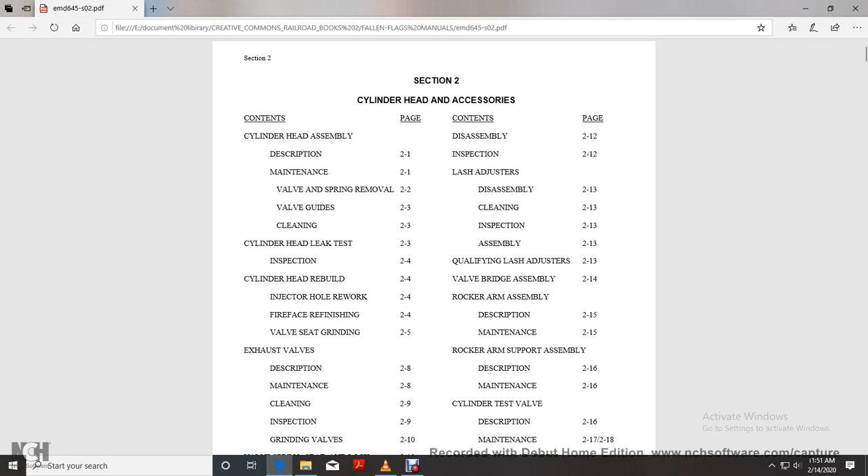Cylinder head assembly: description, maintenance, valve and spring removal, valve guides, cleaning, cylinder head leak test, inspection, cylinder head rebuild, injector hole rework, fire face refinish, valve seat grinding, exhaust valve description, maintenance, cleaning, inspection, grinding valves, valve spring seat lock, exhaust valve seat installation, valve stem height check, valve seat seal test, exhaust valve bridge assembly description, cleaning, disassembly inspection, lash adjusters, disassembly cleaning, inspection assembly, qualifying lash adjuster, valve bridge assembly, rocker arm assembly description maintenance, rocker arm support assembly description maintenance, cylinder test valve description maintenance, cylinder head seating ring description maintenance, service data, specification, equipment list.

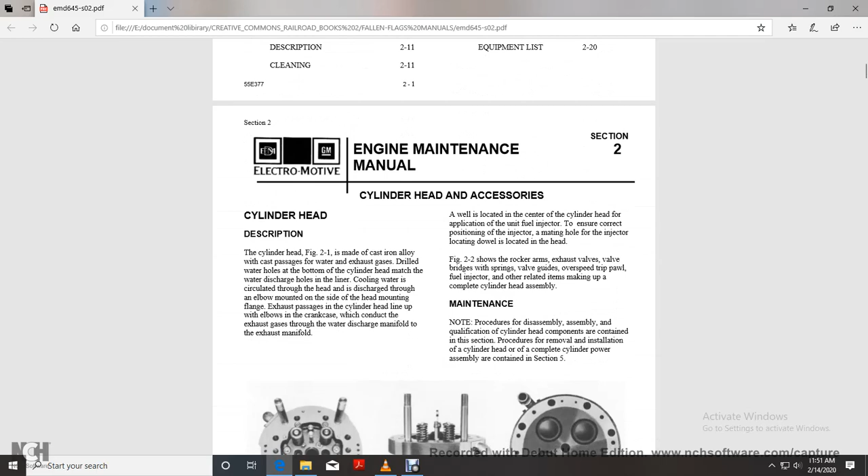Cylinder head and accessories, engine maintenance manual, section 2. Cylinder head and accessories, cylinder head, description.

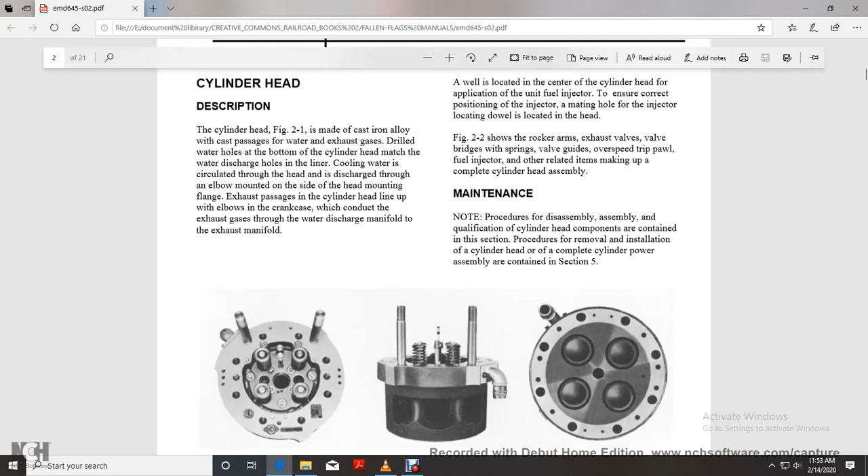Note: procedures for disassembly and qualification of cylinder head components are contained in this section. Procedures for removal and installation of a complete cylinder head power assembly are contained in section 5.

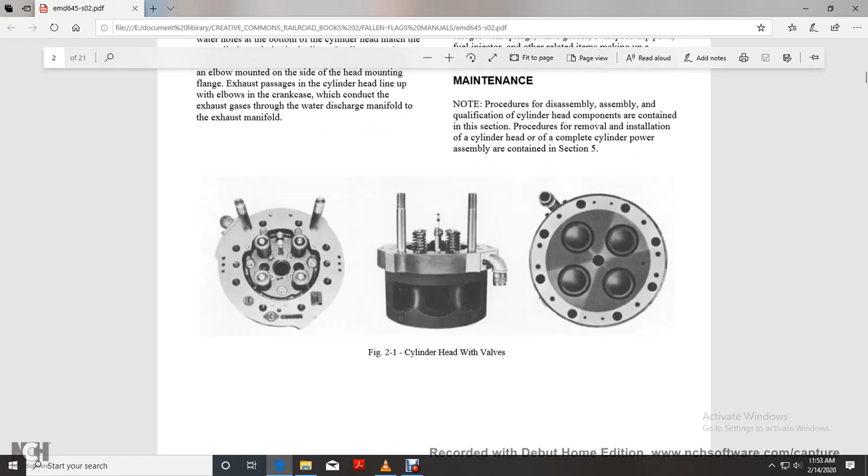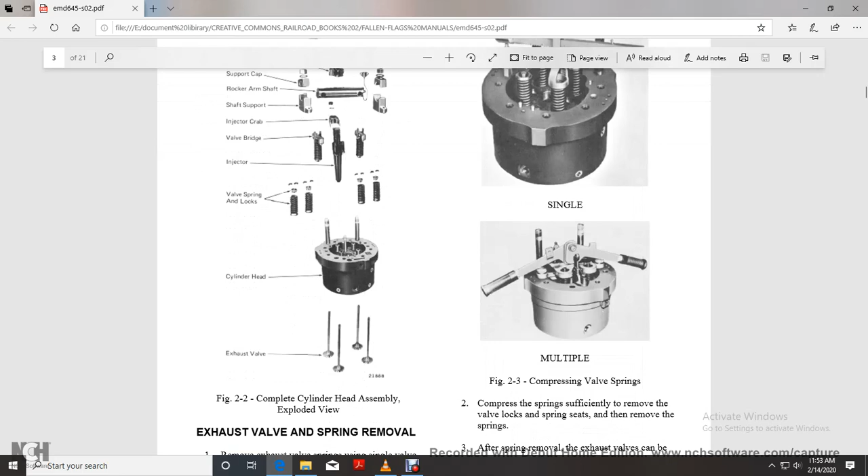So this would look like your cylinder head valve assembly with valves. You have your rocker arms, your overspeed pawl seat, overspeed pawl, the cam support cap screws, rocker arm shaft support, injector crab, valve bridge, valve seating, injector valve spring and locks, cylinder head, exhaust valves. Figure 2-2 shows the cylinder head in exploded view. Figure 2-3 shows the compression tool for the valve springs, used for compressing the valve springs.

Your exhaust valve and spring removal: remove the exhaust valve spring using a single valve compressor adapter screwed into the head, or a multiple valve spring compressor as shown in figure 2-3. Compress the spring sufficiently to remove the valve spring seats, then remove the springs. After spring removal, the exhaust valve is removed from the bottom of the head. Note: the valve springs can be removed in place without removing the cylinder head from the engine. If this is done, the piston must also be at top center to prevent the valves from falling into the cylinder while the valve locks are removed.

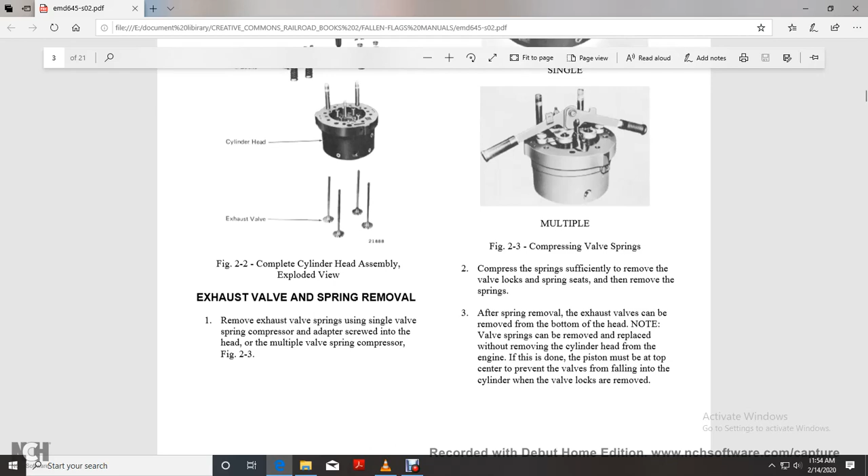Your valve guides: cast iron guides are press fit, and the cylinder head can be pressed in or out using a valve guide installing and removal tool without damage. Although the valve guides generally do not require reaming after assembly, it's recommended that a plug gauge be inserted after guide installation to ensure minimum diameter.

Clean the cylinder head in a suitable solvent to remove strip oil solution and baked-on carbon. Cleaning should be done in accordance with accepted practice or as recommended by the supplier of the cleaning material. Caution: do not use any form of blast cleaning, such as glass, sand, or shot, on the fire face of the head, as the blast tends to remove the sharp edge of the phonographic grooves of the gasket surface, reducing sealing effectiveness.

Remove loosened materials from the stud holes using the hole cleaner with a 115, 200, or 230 volt drill. Figure 2-4 shows cleaning of the stud holes.

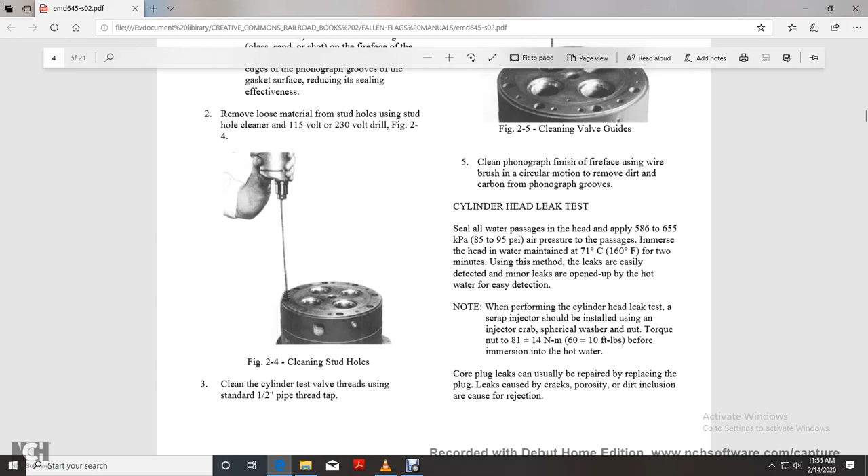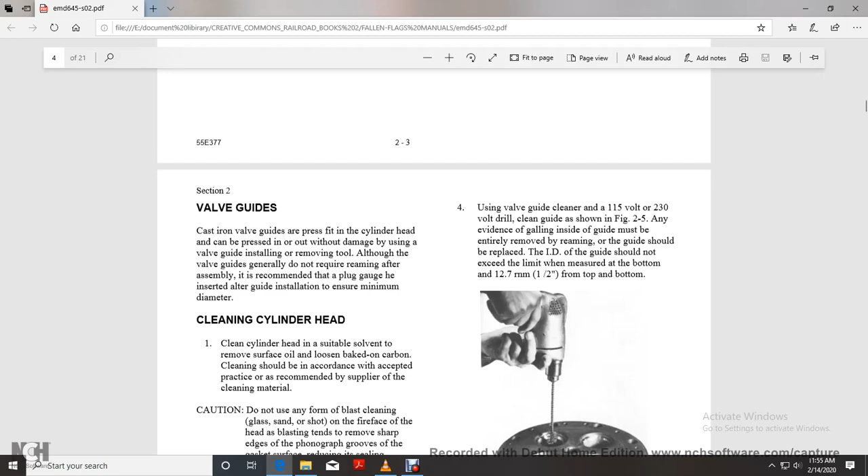The cylinder test valve uses threads using standard 1/2 inch pipe thread. Use the valve guide cleaning tool with a 115 or 230 volt drill; the clean guide is shown in figure 2-5. Any evidence of galling inside the guide must be entirely removed by reaming. If galling cannot be removed, the guide should be replaced, and the inside diameter of the guide should not exceed the limit measured at the bottom, a half inch at the top and bottom.

Figure 2-5 shows cleaning of the valve guides. Clean the phonographic finish fire face using a wire brush with circular motion to remove dirt and carbon from the phonograph grooves.

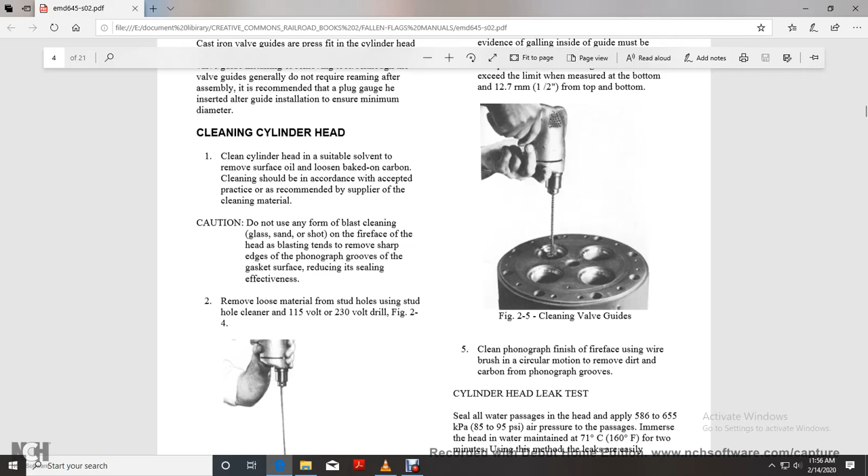Your cylinder head leak test: seal all water passages in the head. Apply 586 to 655 kilopascals of air pressure, or 85 to 95 psi, to the passage. Immerse the head in water maintained at 160 degrees Fahrenheit for 2 minutes using this method. Leaks are easily detected; minor leaks are detected more easily by heating the water.

When performing a cylinder head leak test, scrap injectors should be installed using an injector crab, spherical washers and nuts. Torque nuts at 60 plus or minus 10 foot-pounds, before immersion into the hot water.

Core plug leaks usually require replacing plugs. Leaks caused by cracks, porosity, or dirt inclusions are cause for rejection.

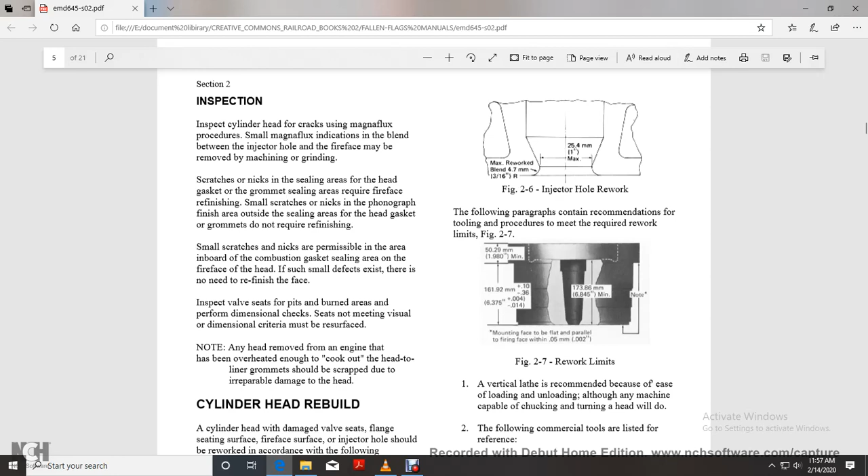Small scratches and nicks are permissible in the area of the inboard combustion gasket sealing area on the fire face of the head. If only such small defects exist, there is no need to refinish the face.

Inspect valve seats for pits and burned areas, and perform dimensional checks. Seats not meeting visual or dimensional criteria must be resurfaced.

Any head removed from the engine that has been overheated, with a cooked-out condition at the head-to-liner grommets, should be scrapped due to irreparable damage to the head.

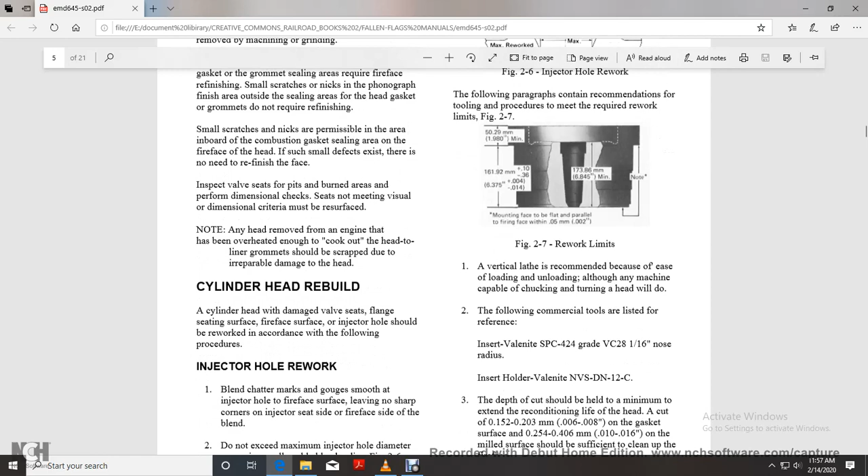For cylinder head rebuild: the cylinder head with a damaged valve seat, flange seating surface, or fire face surface, or injector hole should be reworked in accordance with the following procedure.

Injector hole rework: blend chatter marks and grinder gouges smooth at the injector hole fire face surface. Leave no sharp corners on the injector seat side or fire face side after blending. Do not exceed the maximum injector hole allowable blend radius shown in Figure 2-6.

Next, the fire face and flange seating surface refinish. Refinishing the cylinder head fire face and flange requires small special tool processes. Figure 2-6 shows the injector hole rework.

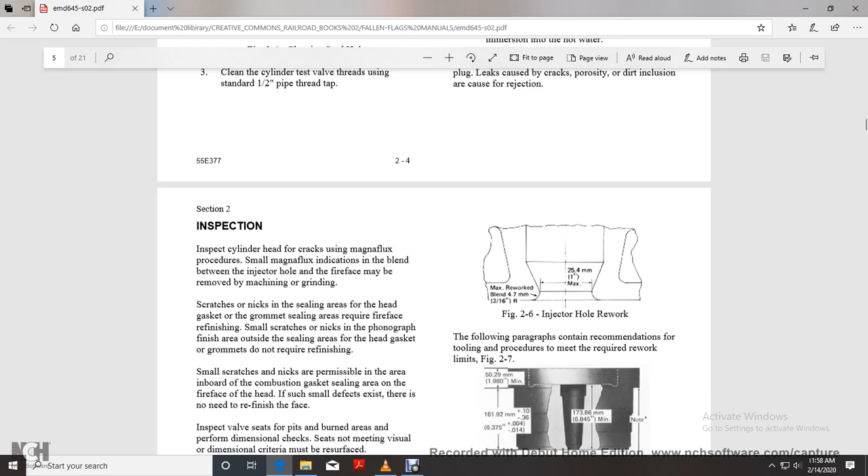Maximum 3/16 of an inch and maximum 1 inch for the rework blend. The following paragraphs contain recommendations, and the following tools and procedures meet the requirements.

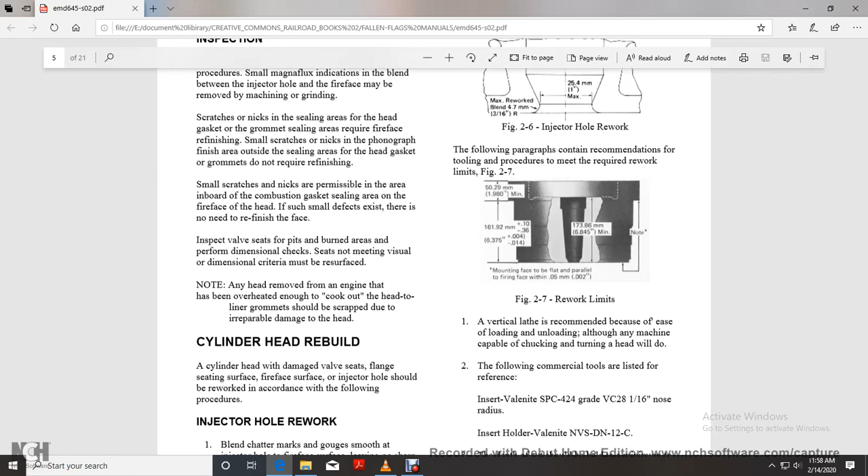Figure 2-7 shows the rework: the mounting face should be flat and parallel to the fire face within 0.002 of an inch. A vertical lathe is recommended for ease of loading and unloading, although a machine capable of chucking and turning the head will also do. The following commercial tools are listed for reference.

Insert: Valenite SPC 424/8, grade VC 28, 1/16 inch nose radius. Insert holder: Valenite.

NVSDN 12C. By the way, happy Valentine's Day. It's February 14th.

Depth of cut should be held to a minimum to extend the reconditioned life of the head. A cut of 6 to 8 thousandths of an inch on the gasket surface and 10 to 16 thousandths on the mill surface should be sufficient to clean up the fire face.

To minimize the depth of cut, care should be taken to set up off the fire face rather than locating off the top of the flange.

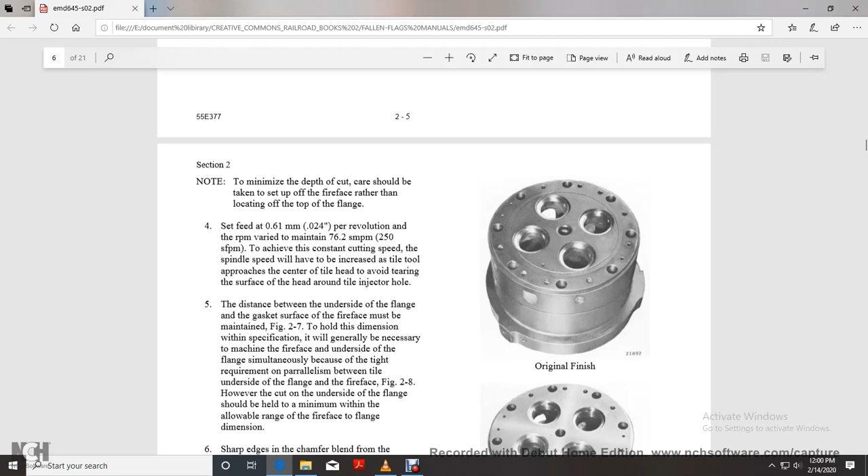The feed should be set at 24 thousandths of an inch per revolution. RPM varies but is maintained at 250 SFPM. To achieve constant surface speed, the spindle speed will have to be increased as the tool approaches the center of the head, to avoid tearing the surface of the head around the injector hole.

The distance between the underside of the flange and the gasket surface of the fire face must be maintained, as shown in Figure 2-7, holding the dimension to specification.

It will generally be necessary to machine the fire face and underside of the flange simultaneously, because of the tight parallelism requirement between the underside of the flange and the fire face.

As shown in Figure 2-8, the cut on the underside of the flange should be held to a minimum within the allowable range of the fire face to flange dimension.

The sharp edge of the chamfered blend at the injector hole fire face must be blended smooth using emery cloth. Deep scratches and gouges should be reworked in accordance with the injector hole rework procedure.

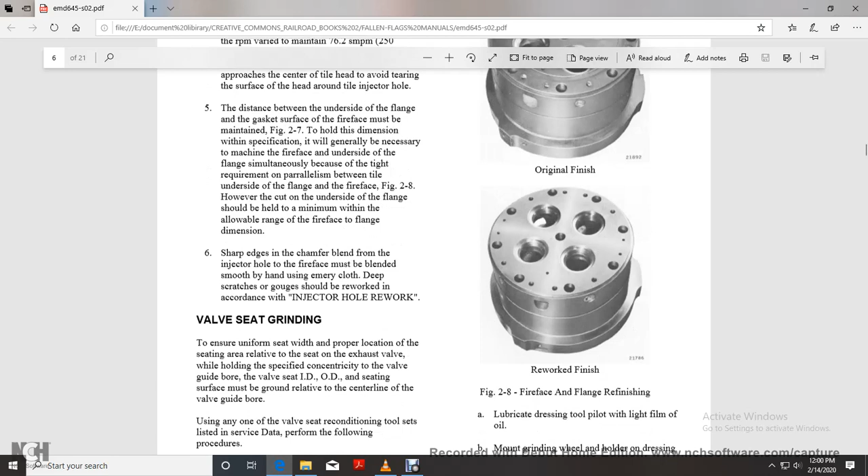Valve seat grinding: to ensure a uniform seat width and proper seating area relative to the valve, while holding specific concentricity to the valve guide bore, the valve seat inside diameter, outside diameter, and seating surface must be ground relative to the center line of the valve guide bore.

Using any of the valve seat reconditioning tool sets listed in the data, perform the following procedures: mount each of the 3 grinding wheels on its own holder, setting the 45 degree wheel to 65 degrees, the 30 degree wheel to 20 degrees, and the finishing wheel to 30 degrees.

Using a separate dressing tool for each wheel, maintain the seat angle accuracy. This shows the fire face and flange refinish, original and reworked finish.

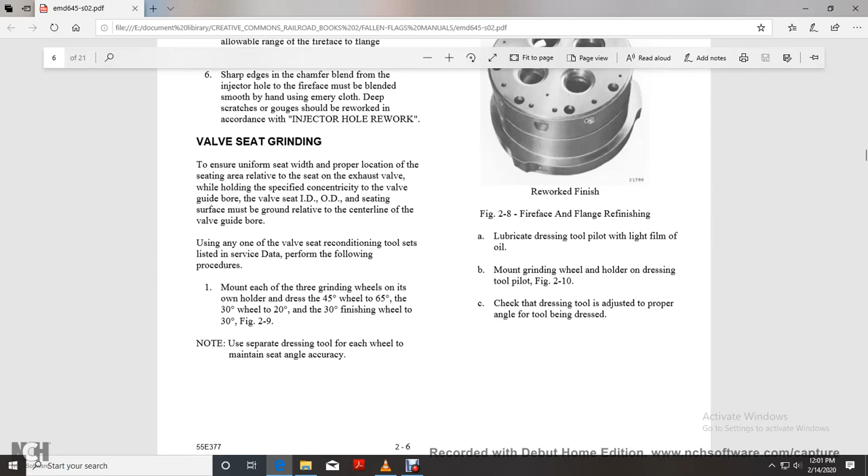Check the dressing tool and adjust the proper angle of the tool to be dressed. Alright, this figure 2.9 shows your valve seat grinding wheels and holders. Inside diameter 65, outside diameter 20, seat surface 30. Alright, figure 2.10 shows your dressing valve seat wheel grinder, grinding wheel holder, grinding wheel dressing valve tool.

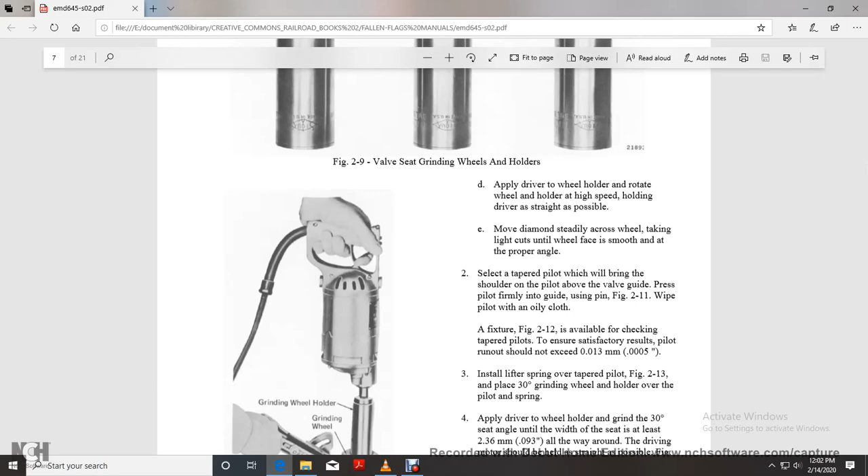Alright, apply the driver to the wheel holder, rotate the wheel holder at high speed, holding the driver as straight as possible. Move the diamond steadily across the wheel, taking light cuts of the wheel face, as smooth and at a proper angle. Select a tapered pilot which will bring the shoulder of the pilot above the valve guide. Press the pilot firmly into the guide, figure 2.11. Wipe the pilot with an oil cloth, fixture 2.12 if available.

Checking tapered pilots is to assure satisfactory results. Pilot runout should not exceed 5/10,000ths of an inch. Install lifter spring over tapered pilot. Figure 2.13, place 30 degree grind wheel holder over the pilot and spring. Apply driver to wheel holder, grind 30 degree seat angle with the width of the seat at least 93/1,000ths of an inch.

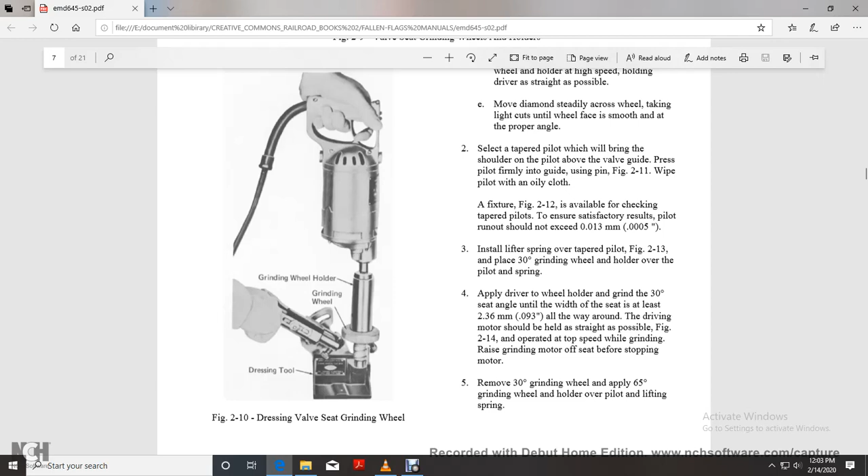All the way around, the driving motor should be held as straight as possible. Figure 2.14, operate at top speed; raise the grinding wheel off the seat before stopping the motor. Alright, remove the 30 degree grind wheel and apply a 65 degree grind wheel and holder over the pilot and lifting spring. Alright, figure 2.11 shows your tapered pilot installation. 2.12, tapered pilot fixture check. 2.13, your lifting spring application. 2.14, grinding valve and seat.

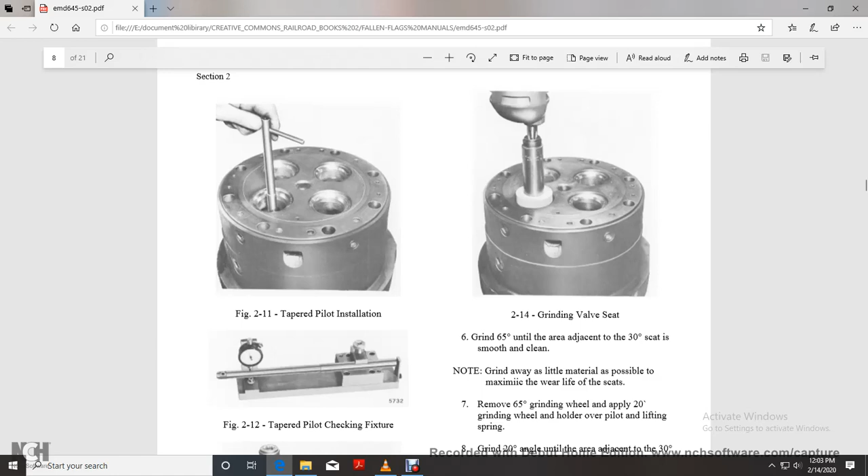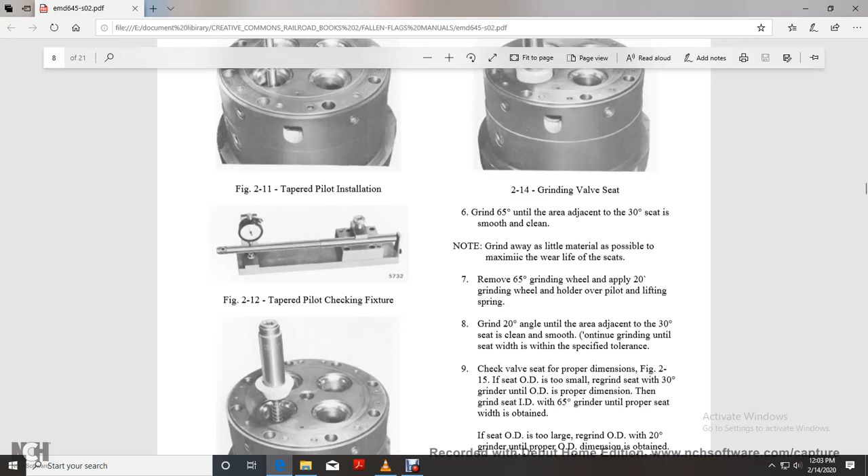Alright, 6, grind 65 degrees until the area adjacent to the 30 degree seat is smooth and clean. Note, grind away as little material as possible to maximize the wear life of the seats. Remove 65 degree grinding wheel, apply 20 degree grinding wheel and holder over the pilot and lifting spring. Grind 20 degree angle until the area adjacent to the 30 degree seat is clean and smooth. Continue grinding until the seat width is within the specified tolerance.

Check the valve seat for the proper dimension, figure 2.15. If seat outside diameter is too small, regrind the seat at 30 degrees until the outside diameter is the proper dimension. Grind the seat inside diameter with the 65 degree wheel until the proper seat width is obtained. If the outside diameter is too large, regrind the outside diameter with a 20 degree grinder until the outside dimension is obtained. If the seat is too small, grind the seat with a 30 degree grinder and the outside diameter with a 20 degree grinder alternately until the proper outside diameter and seat width are obtained.

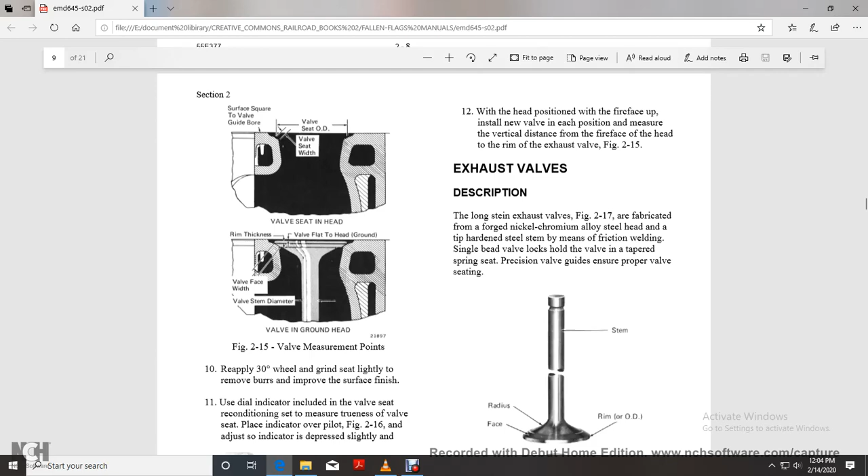Alright, figure 2.15 shows your valve measurement points. Your outside diameter, valve seat width, surface, valve guide bore, rim thickness, valve flat head, valve face width, valve stem diameter. Reapply 30 degree wheel and grind slightly to remove burrs and improve surface finish.

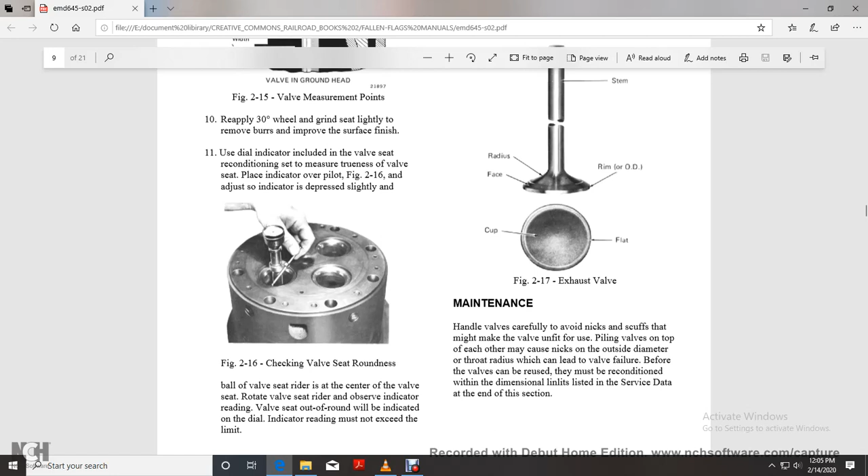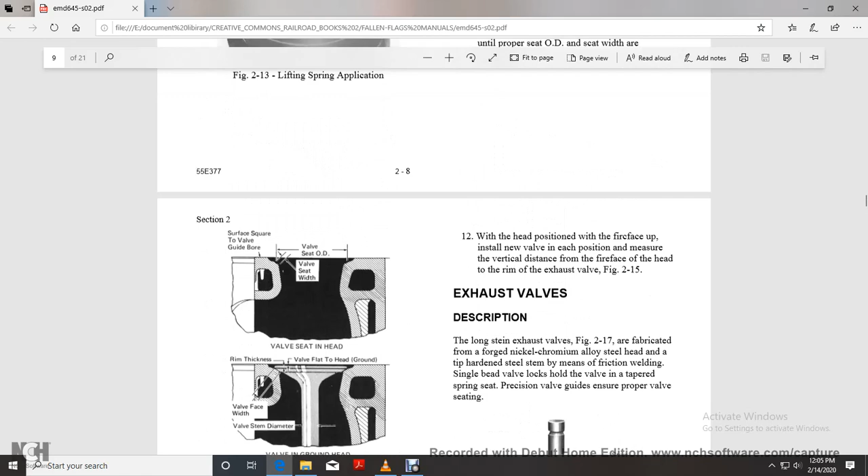Use a dial indicator on the reconditioned valve seat to measure trueness of the valve seat. Place indicator over the pilot, figure 2.16. Adjust so the indicator is depressed slightly and the ball rides in the center of the valve seat. Rotate the valve seat rider. Observe the indicator reading. Valve seat out of round will indicate on the dial. Indicator reading must not exceed limit. 12. With the head positioned fire face up, install the new valve. At each position measure the vertical distance from the fire face of the head to the rim of the exhaust valve, figure 2.15.

Exhaust valve. The long stem exhaust valve is fabricated with a forged nickel chromium alloy steel head and a tip hardened steel stem joined by means of friction welding. Tapered spring seat and precision valve guides ensure proper valve seating. Shows the stem radius, face, the rim outside diameter, cup, and flat.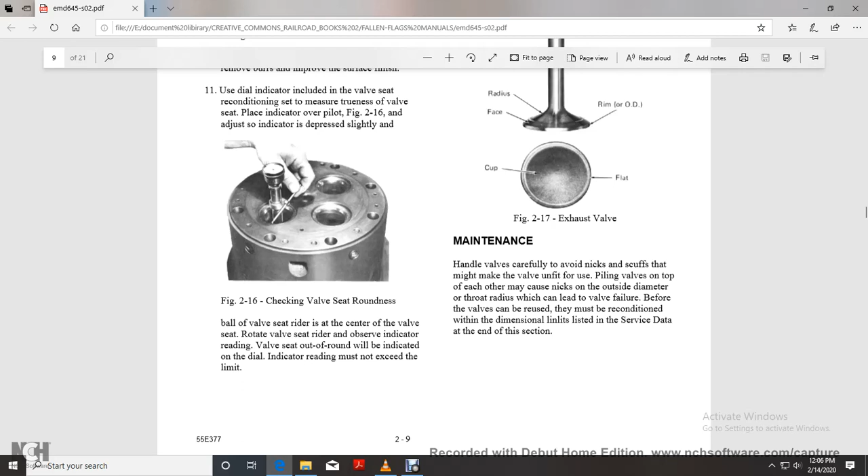Alright, your maintenance. Handle valves carefully to avoid nicks and scuffs that might make the valve unfit for use. Piling the valves on top of each other may cause nicks on the outside diameter and the throat radius, which can lead to valve failure. Before the valves can be reused, they must be reconditioned to the dimensions listed in the service data at the end of this section.

Cleaning. Thoroughly clean the exhaust valve. Use a suitable solvent to remove the surface oil, loose carbon, and if necessary, glass bead. Vapor blasting. Remove the hardened carbon deposits from the valve. The grit for vapor blasting must be maintained at a small enough size so the surface finish of the valve stem is not roughened beyond 0.635 microns or 25 microinches.

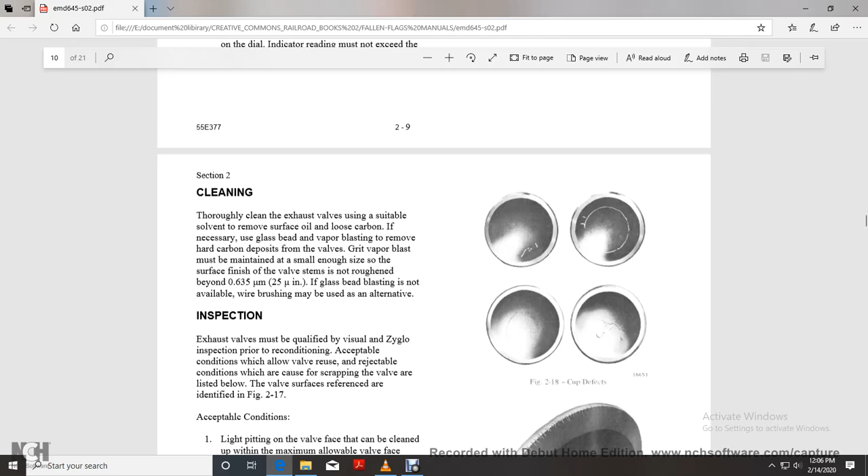If glass bead blasting is not available, a wire brush may be used as an alternative. Inspection: exhaust valves must be qualified by visual Zyglo inspection prior to reconditioning. Conditions which allow for reuse and rejectable conditions of the valve are listed below. The valve surfaces referenced are identified in Figure 217.

Acceptable conditions. Pitted valve faces can be cleaned up to the maximum allowable valve face limit. Protruding nicks and gouges on the valve stem must be removed before the valve face is ground in order to avoid scuffing the valve guide. Ensure proper valve face runout. Sanding or buffing may be used for polishing off protrusions, provided the surface finish of the stem is maintained below 25 micro-inches, with a circumferential lay.

Rejectable conditions. Indications in the cup area, Figure 218, are cause for rejection of the valve. Any cracks found in the outside rim of the ring section of the valve, Figure 219, are cause for rejection, since rim cracks usually extend some distance into the valve face. They usually lead to failure. Figure 218 shows cup defects, and 219 shows face and ring defects.

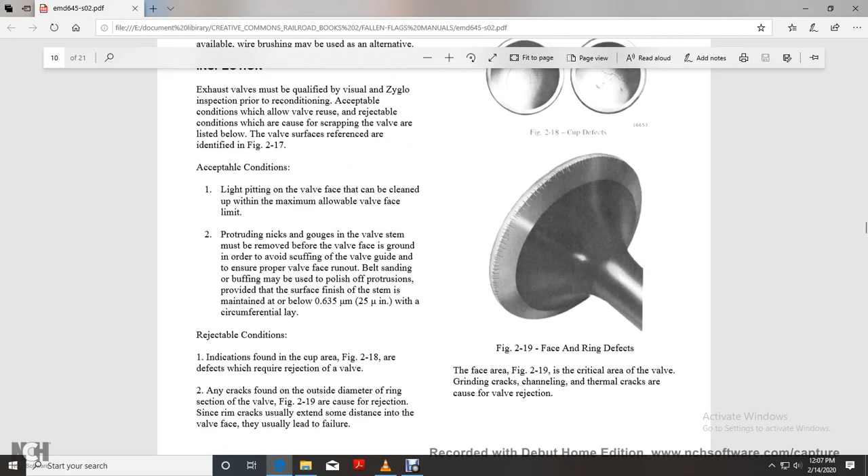Face area, Figure 219, is the critical area of the valve; grind cracks or thermal cracks cause valve rejection. Fretting wear of the lock groove area of the stem is cause for rejection. Reject valves that have damaged critical surfaces that have been nicked or scuffed. Grinding valves: follow instructions supplied with the 115/230 volt valve grinding equipment. The equipment required is contained in the service tool catalog.

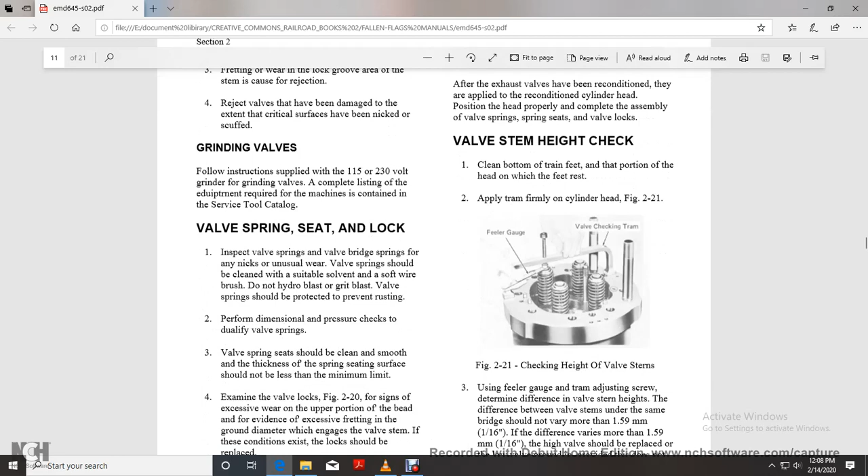Valve spring, seat and lock. Inspect the valve spring and seat for unusual wear. Valve springs should be cleaned with a suitable solvent and a soft wire brush. Do not hydroblast or grit blast. Valve springs should be protected to prevent rusting. Perform dimensional and pressure checks. The valve spring seat should be clean and smooth, and the thickness of the spring seating surface should not be less than the minimum limit.

Examine the valve locks for signs of excessive wear of the upper portion of the bead, or evidence of excessive fretting in the groove diameter that engages the valve stem. If this condition exists, the lock should be replaced. Figure 220 shows the valve spring seat and lock.

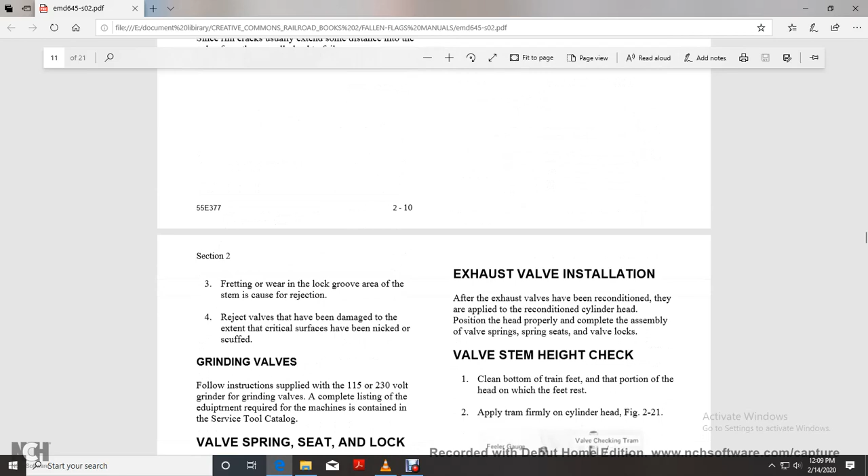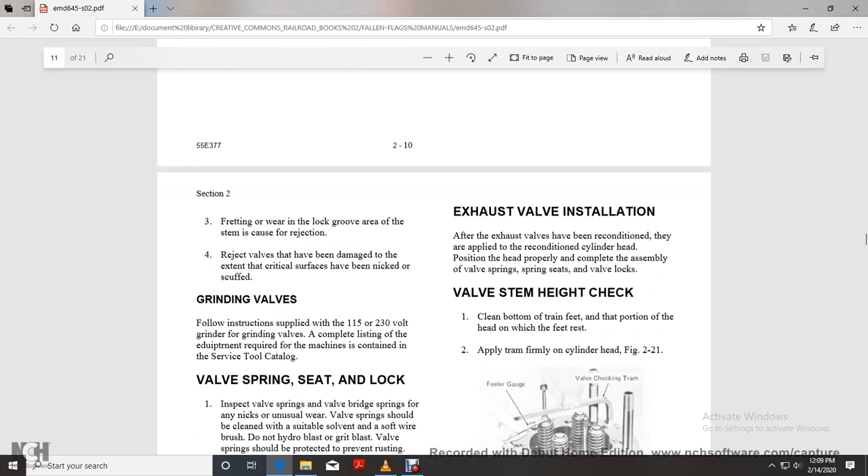Exhaust valve installation. After exhaust valves have been reconditioned, they are applied to a reconditioned cylinder head. Position the head, then complete the assembly of valve spring, seat, and valve lock. Valve stem height check. Clean the bottom of the tram feet rests on the head. Apply the tram firmly on the cylinder head. It shows a feeler gauge checking valves with the tram.

Figure 221. Use the feeler gauge and the tram adjusting screw to determine the difference in valve stem height. The difference between valve stems under the same bridge should be no more than 1/16 of an inch. If the difference exceeds 1/16 of an inch, the high valve should be replaced or the low valve ground in, provided that this does not exceed the limit. The valve stem tip should not be ground off, as it is hardened.

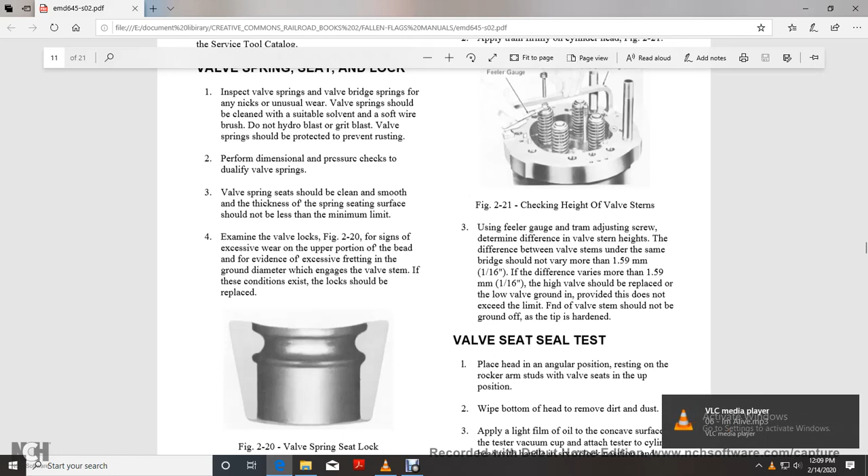Valve seat seal test. Place the head in an angular position resting on the rocker arm studs, valve seats in the up position. Wipe the bottom of the head to remove dirt and dust. Apply a light film of oil to the concave surface of the tester vacuum cup. Attach the tester to the cylinder head, handle in the 6 o'clock position, covering one valve.

Figure 222 shows the use of the valve seat tester. Ensure the tester cup is firmly seated on the fire deck, not on the head of the valve. If the tester suction is depleted in less than 2 minutes, the valve seat is defective. The head seat and the valve face must be reworked. Open the trigger valve to remove the tester from the head surface. Check the tester for leaks by applying it to a vertical piece of glass. If it releases, the rubber cup may be defective.

Exhaust valve bridge assembly. Description: the valve bridge in Figure 223 operates two exhaust valves from one rocker arm. The spring seat is held on the valve bridge stem by a lock; the spring seat rests in a socket of the cylinder head, and the spring applies pressure to maintain contact between the valve bridge and the rocker arm. The hydraulic lash adjuster maintains zero lash between the end of the valve stem and the valve bridge. Lube oil flows from the rocker arm through the drilled passage in the valve bridge and onto the top of the lash adjuster.

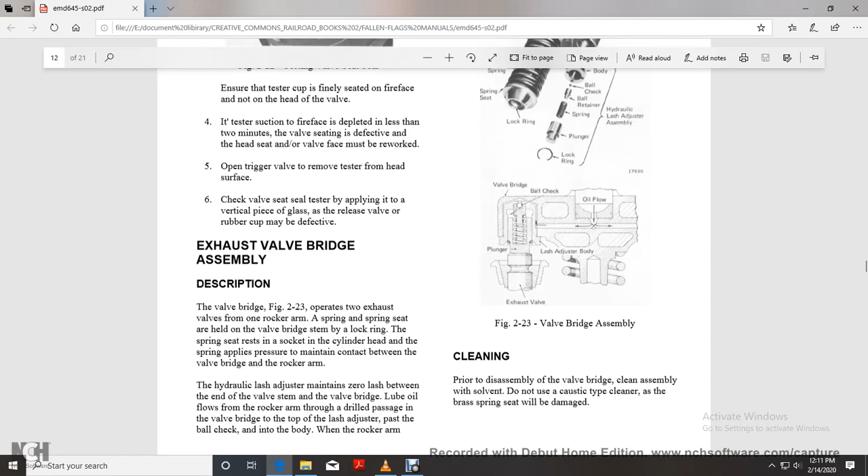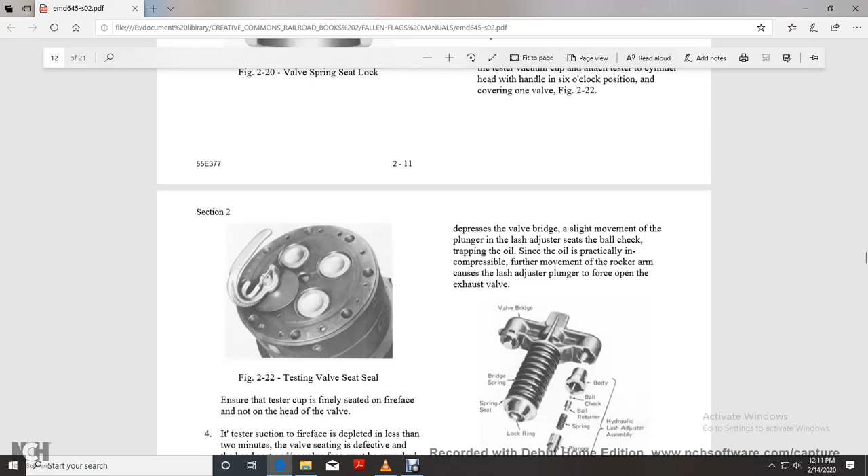Push past the ball check into the body when the rocker arm depresses the valve bridge, slightly moving the plunger, seating the ball check and trapping the oil. Since the oil is practically incompressible, further movement of the rocker arm causes the lash adjuster plunger to force open the exhaust valve.

Alright, this shows your valve bridge assembly. It shows the valve bridge, your bridge spring seat and body, ball check, ball retainer, springs, plunger, lock ring, hydraulic lash adjuster. So here's your valve bridge, your ball check valve, plunger, lash adjuster, oil flow, and plunger.

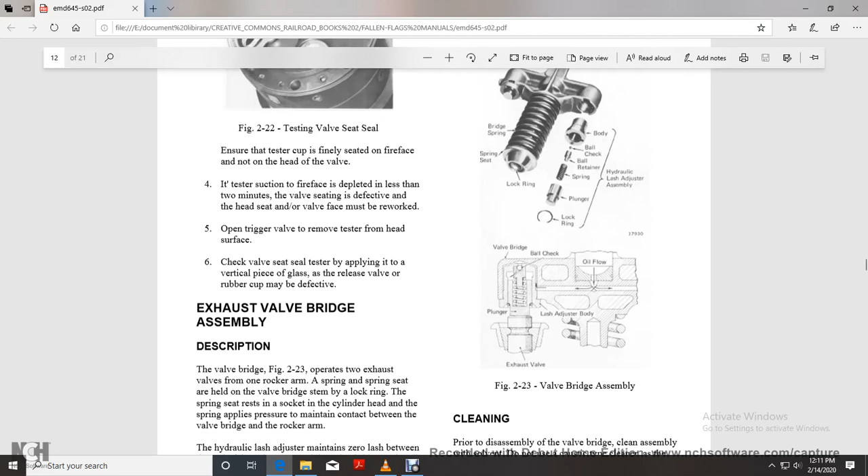Prior to disassembly of the valve bridge, clean the assembly with a solvent. If you use a caustic type cleaner, the spring seat will be damaged. For disassembly, remove the lash adjuster assembly from the bridge using an adjuster puller, figure 224. We'll remove the hydraulic lash adjuster.

Mount the valve bridge spring compressor in a vise, figure 225. Install the valve bridge in compressor, compressing the spring. Remove the lock ring. Remove the spring seat and spring.

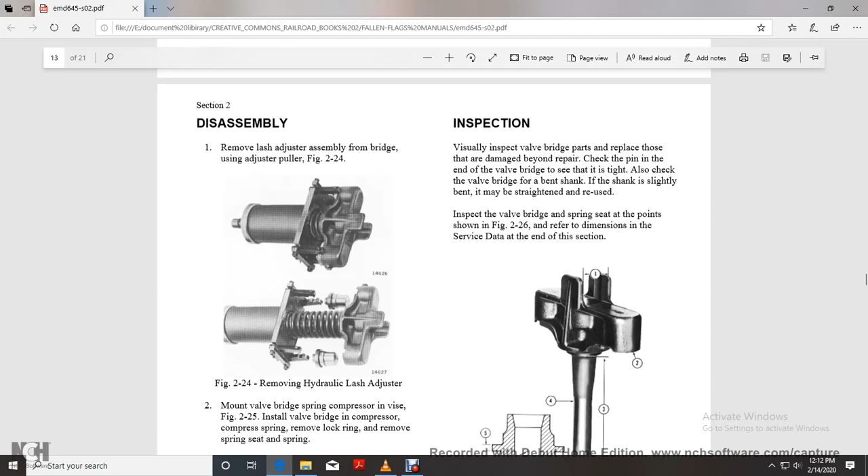Inspection. Visually inspect the valve bridge parts and replace those damaged beyond repair. Check the pin end of the valve bridge to see that it's tight, and check if the valve bridge shank is bent. If the shank is slightly bent, it may be re-straightened and reused. Inspect the valve bridge spring seat at points shown in figure 226 and refer to the dimensions data at the end of the section.

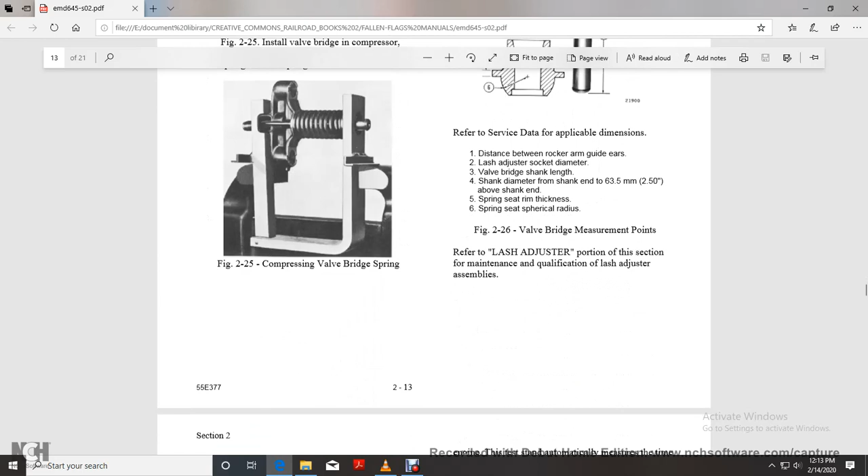Alright, 1 would be your distance between rocker arm guide ears. 2, lash adjuster socket diameter. And then valve bridge shank, 3 and 4 would be your shank diameter from the shank end to above the shank end. 5 is the spring seat rim thickness. 6 is the spring seat spherical radius. Refer to the lash adjuster portion of the section for the maintenance and qualification of the lash adjuster assembly.

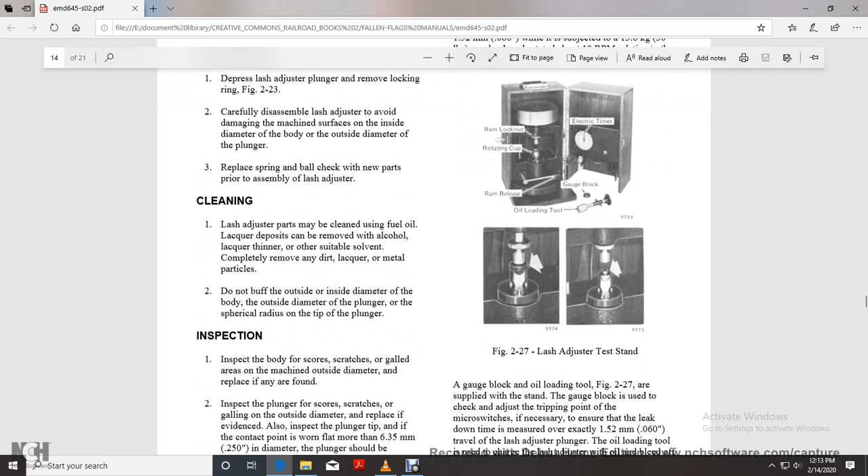Alright, your lash adjuster. Depress the lash adjuster plunger, remove the locking ring, figure 223. Carefully disassemble the lash adjuster, avoid damaging the machined surface of the inside diameter of the body or the outside diameter of the plunger. Replace the spring and ball check with new parts prior to lash adjuster assembly.

Cleaning: lash adjuster parts may be cleaned using fuel oil. Lacquer deposits can be removed with alcohol, lacquer thinner or suitable solvent. Completely remove any dirt, lacquer, or metal particles. Do not buff the inside diameter of the body, the outside diameter of the plunger, or the spherical radius of the tip of the plunger.

Inspection. Inspect the body for scores, scratches or galling of the machined diameter and replace if any are found. Inspect the plunger for scores, scratches and galling on the outside diameter, replace if evident. Inspect your plunger tip, and if the contact point is worn more than 250 thousandths of an inch in diameter, the plunger should be replaced.

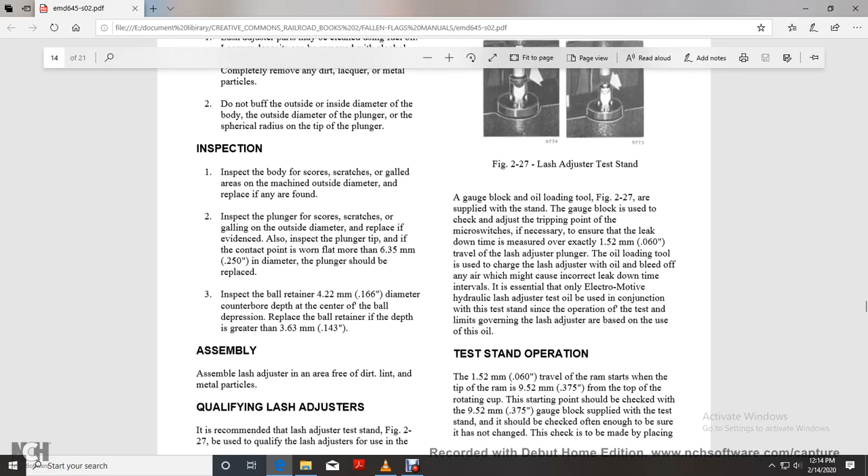Inspect the ball retainer, 166 thousandths of an inch diameter counterbore, for depth of the center of the ball depression. Replace the ball retainer if depth is greater than 143 thousandths of an inch. Assembly. Assemble the lash adjuster in an area free of dirt, lint and metal particles.

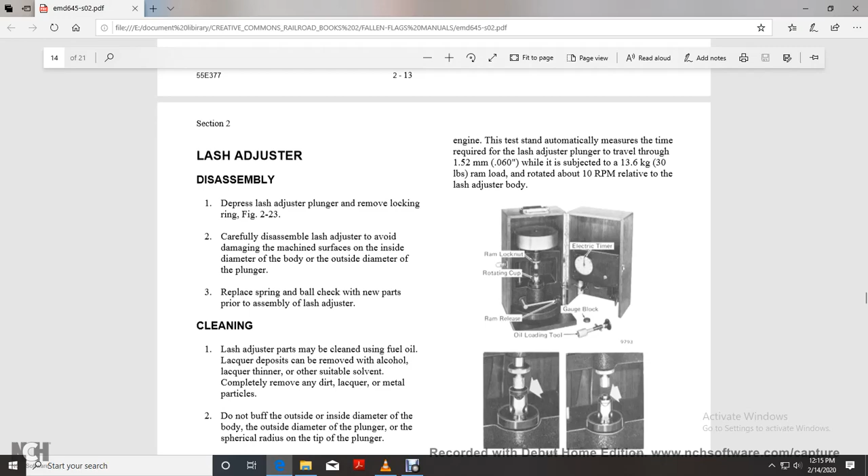Qualifying the lash adjuster: the recommended lash adjuster test stand, figure 227, should be used to qualify the lash adjuster for use. The test stand automatically measures the time required for the lash adjuster plunger to travel 60 thousandths of an inch while subject to 30 pounds of ram load, rotated at 10 RPM. It shows the ram lock nut, rotating cup, electric timer, lash adjuster test stand.

A gauge block and oil loading tool, figure 227, are supplied with the stand. The gauge block is used to check and adjust the tripping point of the micro switch, which is necessary to ensure that the leak-down time is measured exactly at 60 thousandths of an inch travel. The lash adjuster oil loading tool is used to charge the lash adjuster with oil and bleed off any air that might cause incorrect leak-down time intervals.

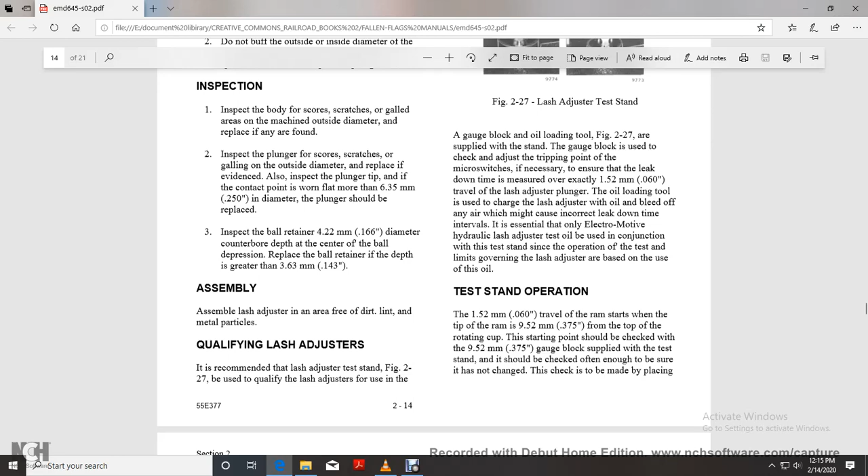The hydraulic lash adjuster test oil is used in conjunction with the test stand, and the operation test limits governing the lash adjuster are based on the use of this oil. Test stand operation: the ram starts with the tip of the ram at 375 thousandths of an inch from the top of the rotating cup.

The starting point should be checked with the 0.375 inch gauge block supplied with the tester, often enough to ensure it has not changed. The check is made by placing the gauge block on top of the rotating cup at the tip of the lash adjuster, lowering the ram, and the timer clock of the test stand should start the very moment the ram contacts the gauge block. If the timer does not start, or starts too soon, the ram should be readjusted.

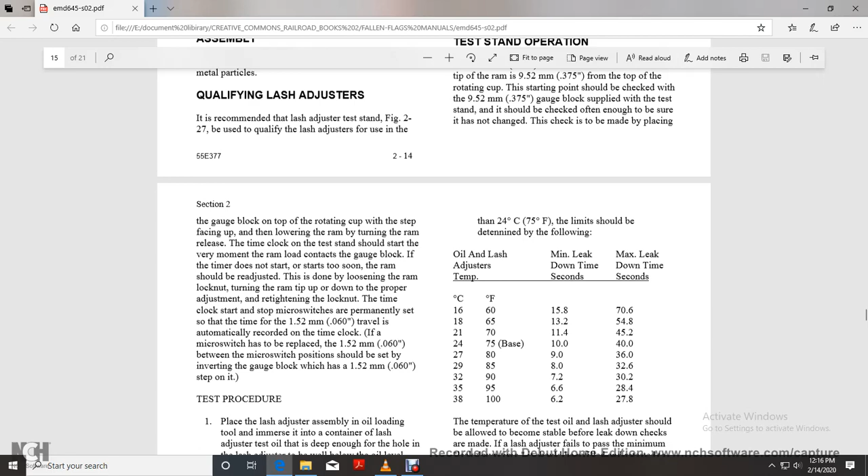This is done by loosening the lock nut, turning the ram tip up or down to the proper adjustment, then tightening the lock nut. The clock start-stop microswitch is permanently set so the time for 0.060 of an inch travel is automatically recorded on the timer clock. If the microswitch has been replaced, the 0.060 inch between-switch position should be set using a gauge block with a 0.060 inch step on it.

All right, your test procedure. Place the lash adjuster assembly in the oil loading tool and immerse it in the container of test oil, deep enough for the hole of the lash adjuster to be well below the oil level. Completely depress the lash adjuster plunger at least 10 times to ensure the air trapped inside is pumped out. Retract the spring loading plunger of the tool. Allow the ball check to seat, then depress the lash adjuster plunger 2 or 3 times.

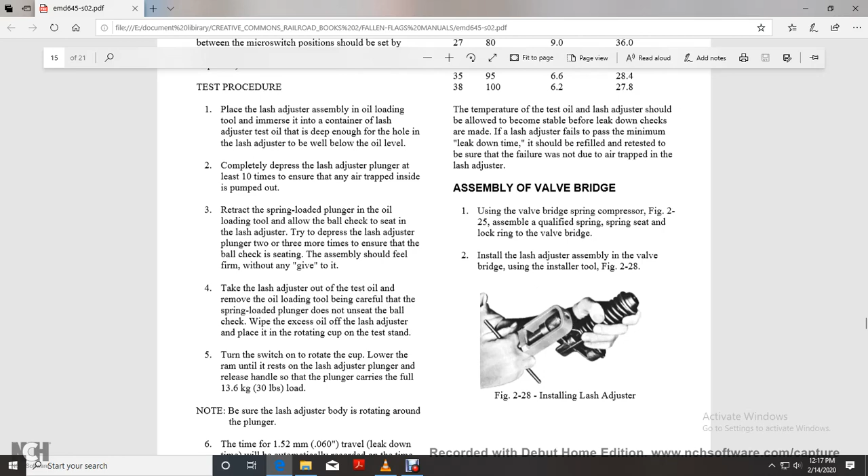Ensure that the ball check is seated. The assembly should be filled and firm without any give in it. Remove the lash adjuster filled with test oil from the loading tool. Be careful the spring loading tool does not unseat the ball check. Wipe excess oil off the lash adjuster. Place it in the rotating cup of the tester and turn the switch to rotate the cup. Lower the ram until it rests on the lash adjuster plunger. Release the handle to apply the full 30-pound load.

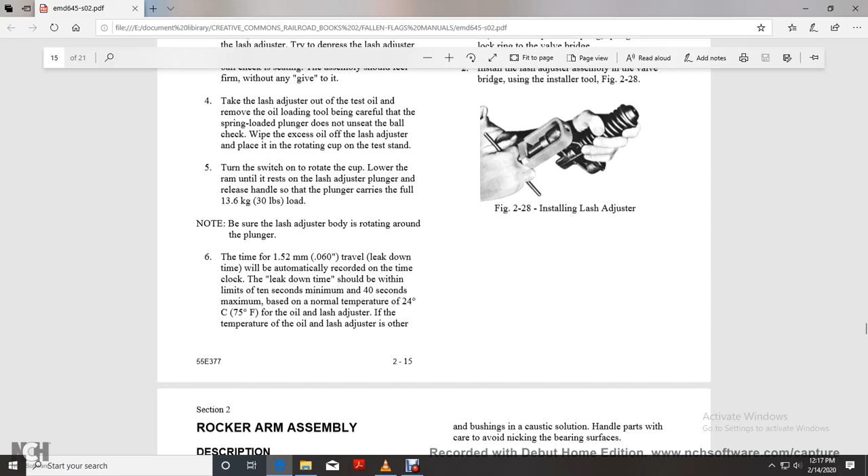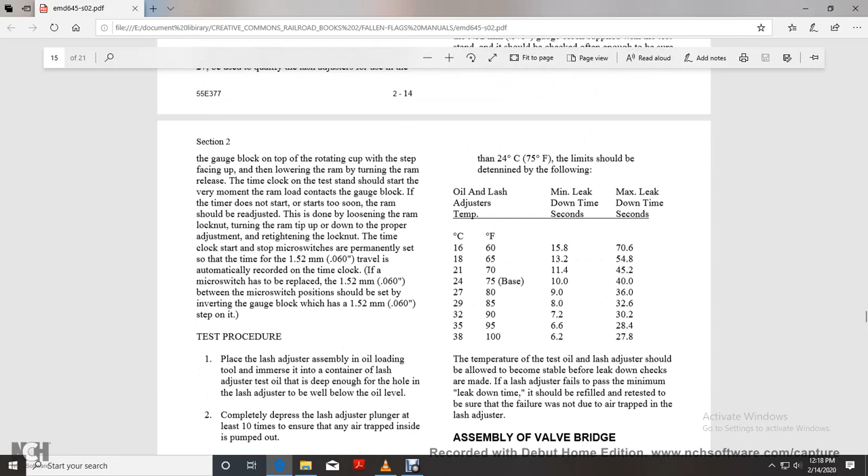Be sure the lash adjuster is rotating. The time for 0.060 inch plunger travel will automatically be recorded on the clock. Leak down time should be within the limits of 10 seconds minimum and 40 seconds maximum, based on a normal temperature of 75 degrees Fahrenheit. If the temperature of the oil and lash adjuster is other than 75 degrees, limits should be as contained in the following table, which shows minimum and maximum leak down time at different oil temperatures. The temperature of the test oil and lash adjuster should be allowed to become stable before leak down checks are made.

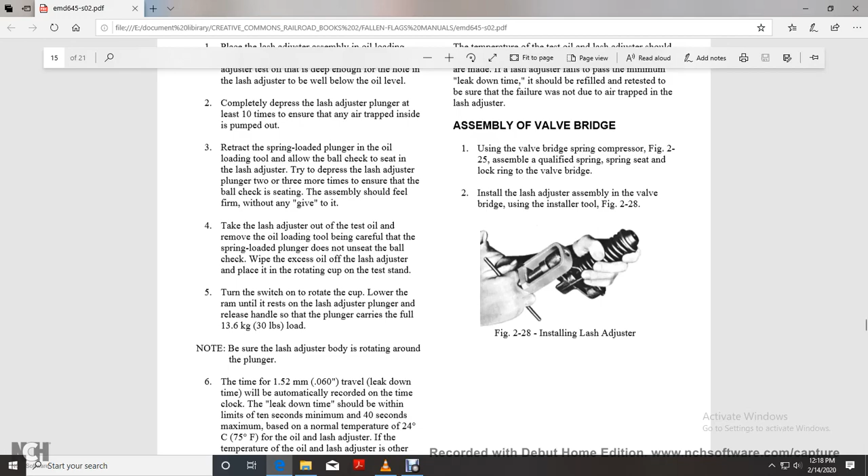Lash adjusters that fail to pass the minimum leak down test should be refilled and retested. Make sure the failure was not due to air trapped in the lash adjuster. All right, assembly of the valve bridge. Using the valve bridge spring compressor, figure 225, assemble the spring, spring seat and lock ring to the valve bridge, and install the lash adjuster assembly in the valve bridge using the installer tool, figure 228.

All right, your rocker arms. There are 3 rocker arms mounted on the cylinder head. 2 rocker arms actuate 4 exhaust valves. The third operates the injector. The rocker arms are operated directly by the camshaft through a cam follower roller mounted in the fork end of each rocker arm. The opposite end of each rocker arm has an adjusting screw for setting injector timing or adjusting the hydraulic adjuster. The injector rocker arm, although similar in appearance to the exhaust rocker arm, is stronger.

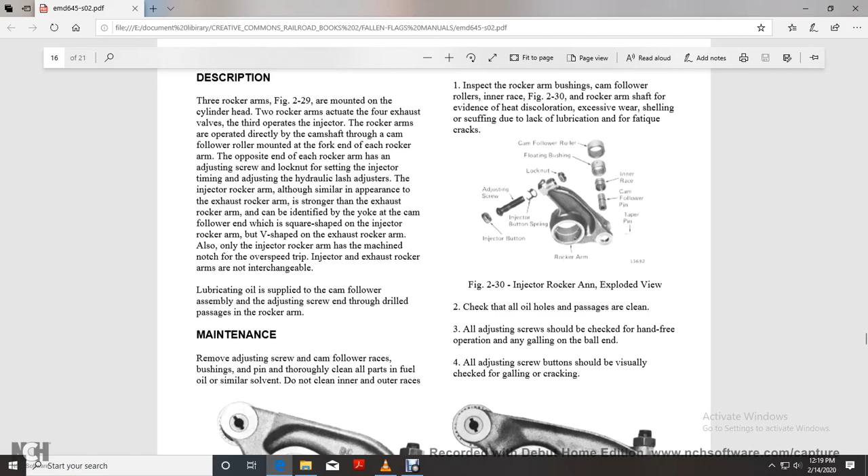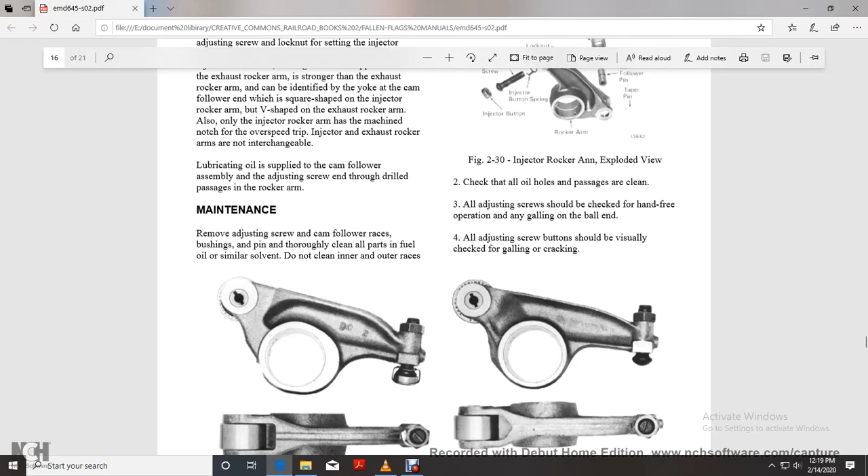It can be identified by the yoke at the cam follower end, which is square shaped on the injector rocker arm but V shaped on the exhaust rocker. Also, the injector rocker arm has a machined notch for the overspeed trip. Injector and exhaust rockers are not interchangeable. Lubricating oil is supplied to the cam follower through the adjusting screw and the drilled passage of the rocker arm. Remove the adjusting screw, the follower, bushing and pin. Thoroughly clean all parts in fuel oil or similar solvent, and do not clean inner and outer races and bushings in caustic solution. Handle parts with care to avoid nicking bearing surfaces.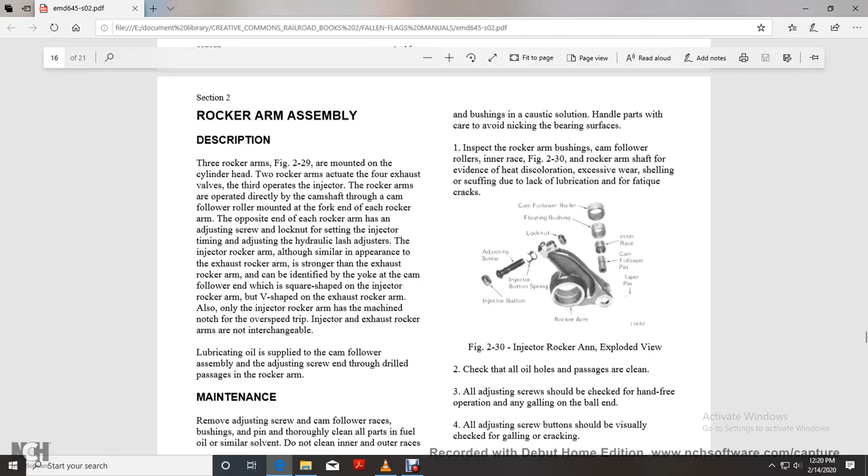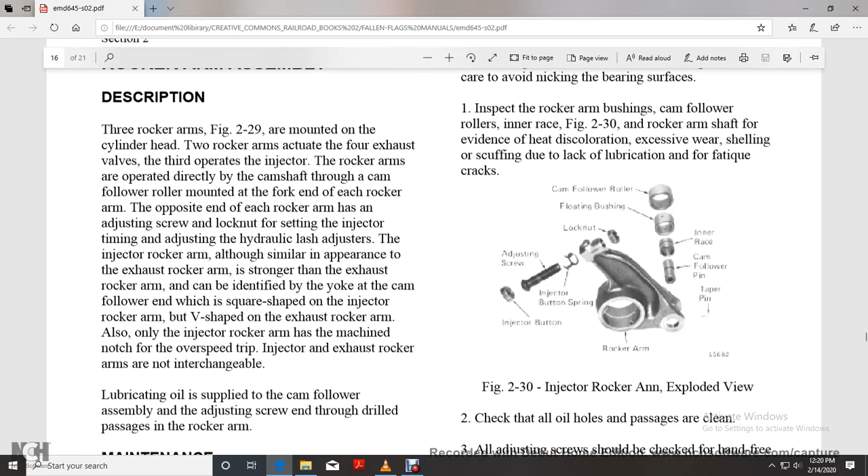Inspect rocker arm bushings, followers, rollers and inner races, figure 2-30, and the rocker arm shaft for evidence of heat discoloration, excessive wear, shelling, scuffing due to lack of lubrication, and fatigue cracks. Figure 2-30 shows the injector rocker arm exploded view. So we'll just go a little bit more in. It shows the cam follower roller, floating bushing, lock nut, inner race, cam follower pin, taper pin. It shows your lock nut, adjuster screw, and here, the button spring, injector button, rocker arm.

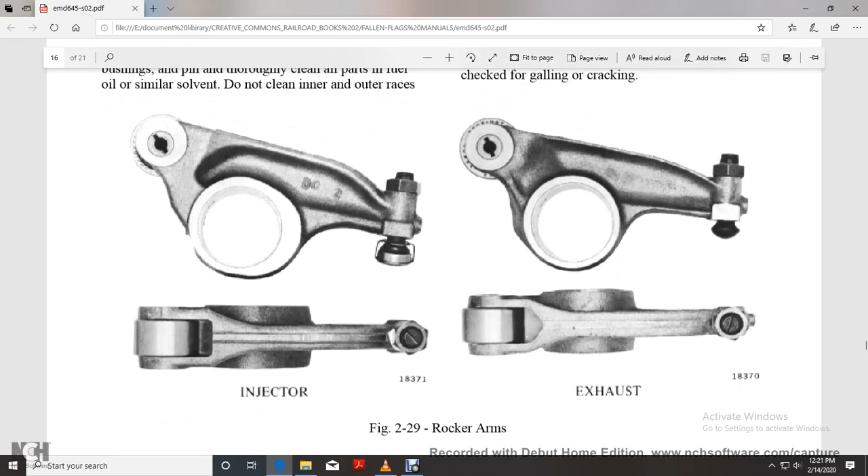All right, check that all holes and passages are clean. All adjusting screws should be checked for free operation. The ball and adjusting screw button should be visually checked for galling and cracking. So this one's the injector screw. This is about the only difference, really.

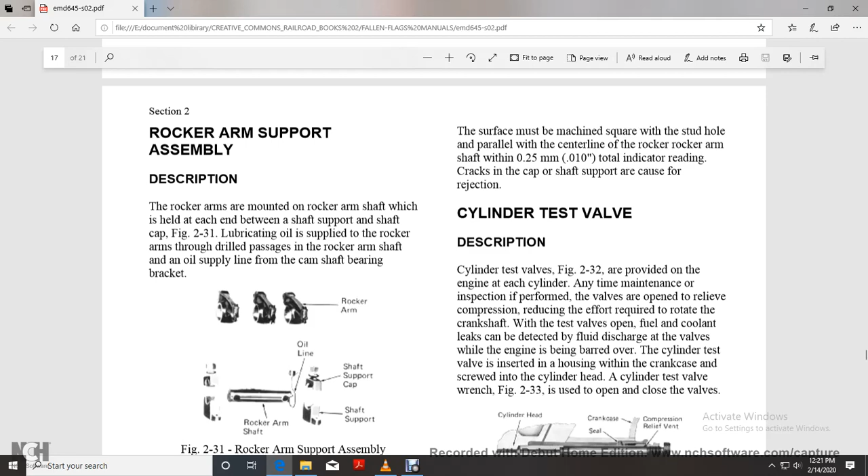Alright, rocker arm support assembly. There are 3 rocker arms mounted on the rocker arm shaft, which is held at the end by the shaft support. Lubricating oil is supplied to the rocker arm through drilled passages in the rocker arm shaft, with an oil supply line from the camshaft bearing bracket. Figure 2-31 shows the rocker arm support shaft, rocker arm, and then this shows the shaft support cap and shaft support.

Alright, maintenance. Thoroughly clean shaft support and caps in solvent. Check oil passages and shaft oil line are clean and free of obstruction. Check shaft diameter for wear and proper dimensions. Check for scratches and galling in bearing areas. Check shaft support for correct height of the dimension between base and bottom of bore. Hold dimension within limits and ensure the height mismatch between supports at any one cylinder is within 0.006 inch; mismatch greater than this can lead to camshaft lobe distress and broken rocker arm studs.

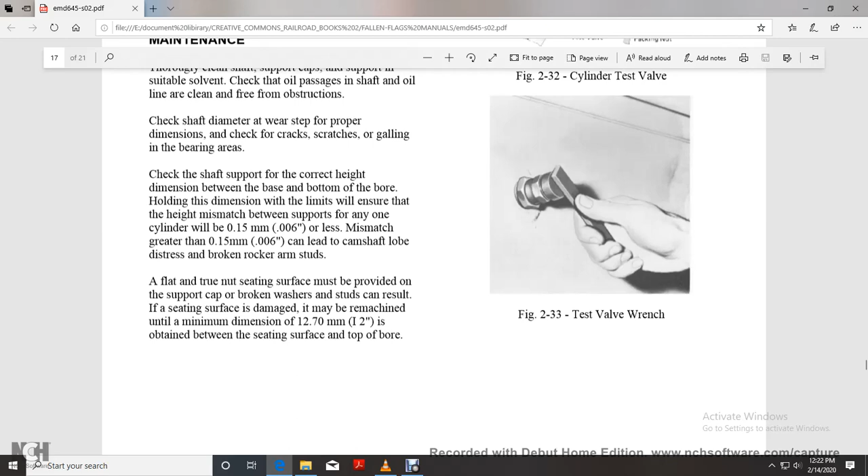A flat, true nut seating surface must be provided on the support cap. Broken washers and studs can result. After seating surface damage, it may be remachined until a minimum dimension of 0.5 inches is obtained from the seating surface to the top of the bore. The surface must be machined square with the centerline of the rocker arm shaft within 0.010 of an inch total indicator reading. Cracks in caps or shaft supports are cause for rejection.

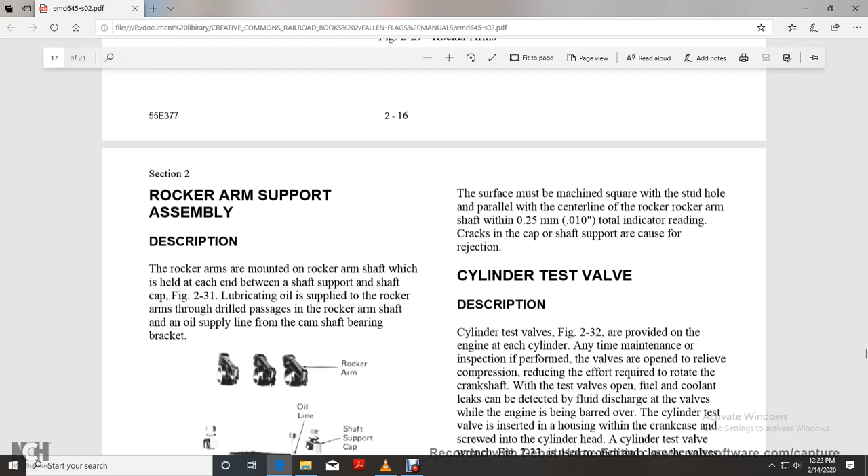Your cylinder test valve. All right. The cylinder test valve is provided on each engine cylinder for when maintenance and inspection is performed. The valves are opened to relieve the compression and reduce the effort to rotate the crankshaft. With the test valves open, fuel, oil, or coolant leaks can be detected by fluid discharge from the valves while the engine is being barred over. The cylinder test valve is installed through a hole in the crankcase and screwed into the cylinder head with the cylinder test valve wrench.

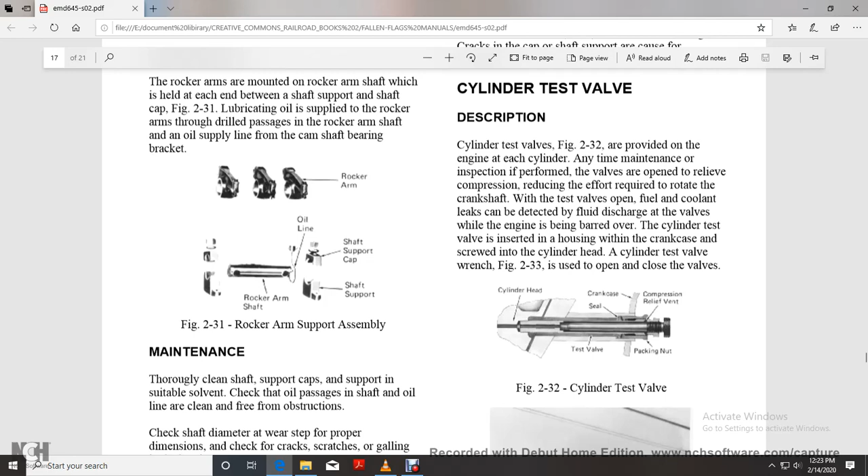In Figure 2-33 is the open and closed valve. Figure 2-32 shows the test valve: cylinder test valve, cylinder head, crankcase, packing nut, test valve seal. It also shows the test valve wrench. Maintenance. If the cylinder test valve is leaking, check that the packing nut has been torqued to 60 to 65 foot-pounds. If not, tighten, but do not over-tighten the seal. Figure 2-32, check the correctly tightened packing nut. Should the valve have a continual leak,

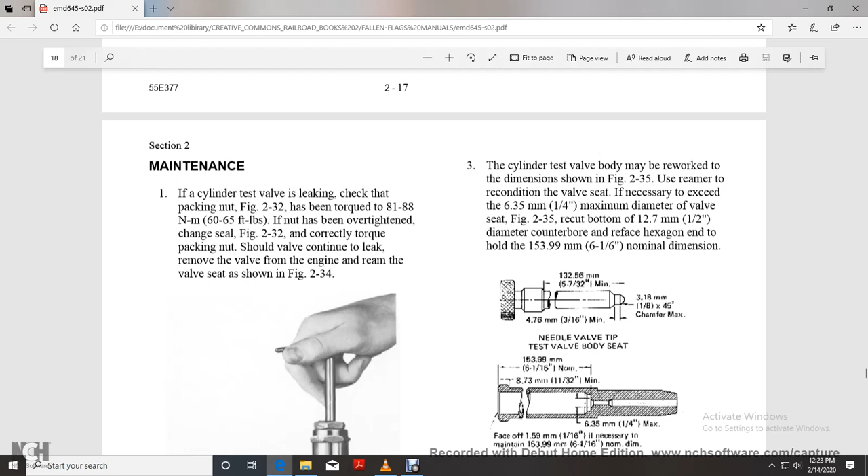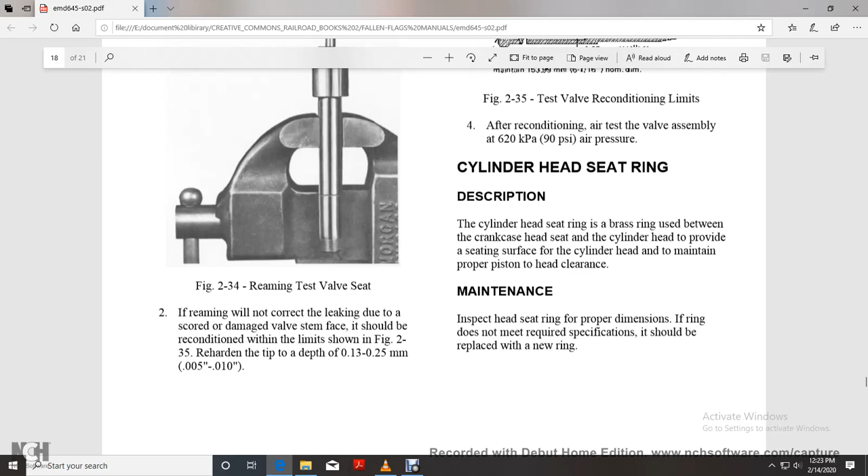remove the valve from the engine and ream the valve seat, Figure 2-34. Figure 2-34 shows reaming the test valve seat. If reaming will not correct the leaking due to a scored or damaged valve stem face, it should be reconditioned within limits in Figure 2-35. Reharden the tip to a depth of 0.005 to 0.010 of an inch. Rework the cylinder test valve to the dimensions shown in Figure 2-35; reaming and reconditioning the valve stem must not exceed 1/4 inch maximum diameter of the valve seat.

Figure 2-35: recut with a 1/2 inch diameter counterbore. Reface hex end to the 6 and 1/16 of an inch nominal dimension. Figure 2-35 shows test valve reconditioning, with the needle valve tip and test valve body. After reconditioning, air test the valve assembly at 90 psi air pressure.

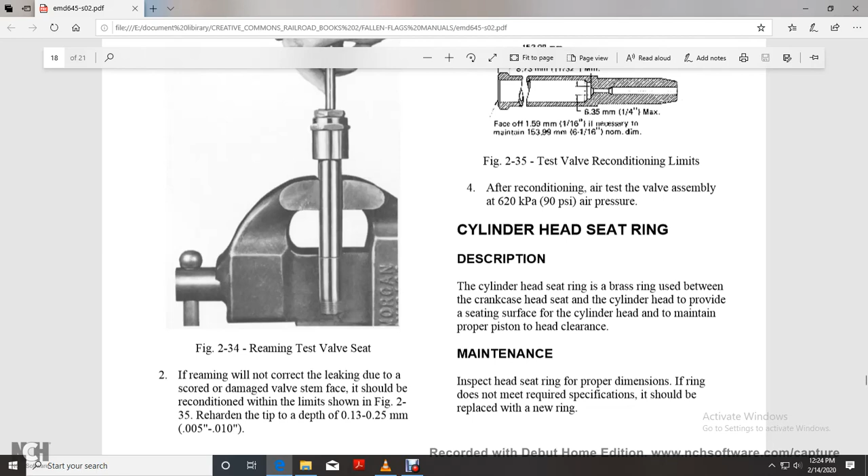Alright, your cylinder head seat ring. Description: the cylinder head seat ring is a brass ring between the crankcase head seat and the cylinder head to improve the seating surface of the cylinder head and maintain proper piston to head clearance. Maintenance: inspect seating ring for proper dimension; a ring that does not meet the required specification should be replaced with a new ring. And then it goes over service data: cylinder head valve seat angle 30 degrees 0 minutes to 30 degrees 15 minutes. Valve seat width 0.093 to 0.125 inch. Variation in seat width max 0.015 inch.

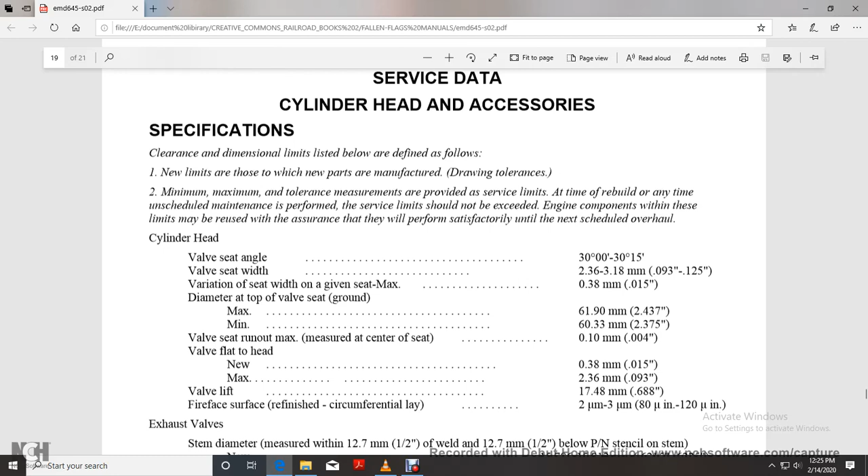Diameter of the top of the valve seat maximum 2.437 inch, minimum 2.375 inch. Valve seat runout max 0.004 inch. Valve flat to the head 0.015 inch, maximum 0.093 inch. Valve lift 0.688 of an inch. Fireface surface refinished, circumferential lay, 80 to 120 microinches. Exhaust valve stem diameter new 0.6215 to 0.6225 of an inch.

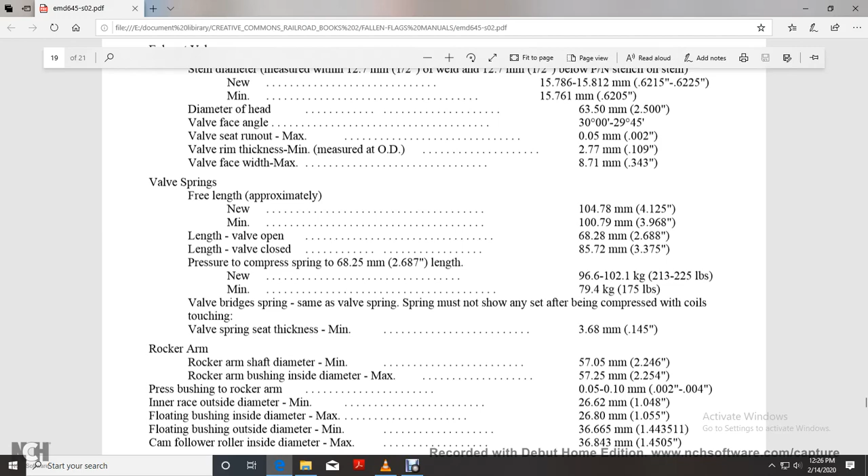Diameter of head at 2.5 inches. Valve face angle 30 degrees 0 minutes to 29 degrees 45 minutes. Valve seat runout max 0.002 inch. Valve rim thickness minimum 0.109 of an inch. Valve face width 0.343 of an inch. Valve spring 4.125 of an inch, 3.968, and then it continues and it goes over all the rest.

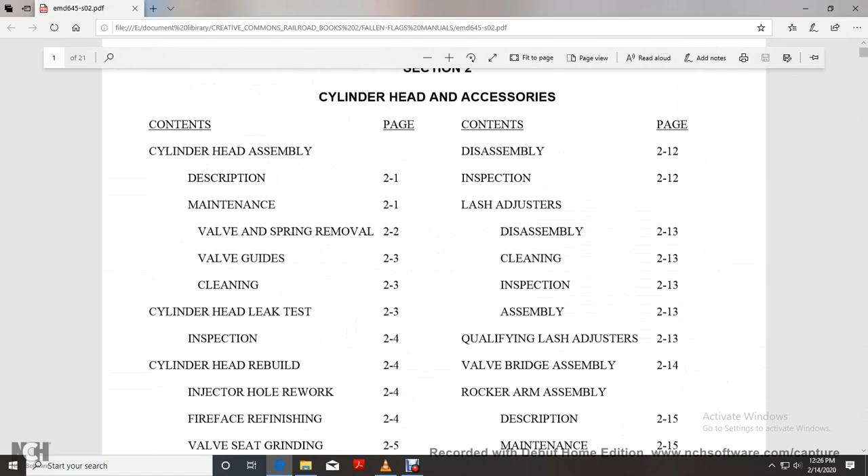Alright, this is section 2 of the Electro-Motive Division, cylinder head and accessories.